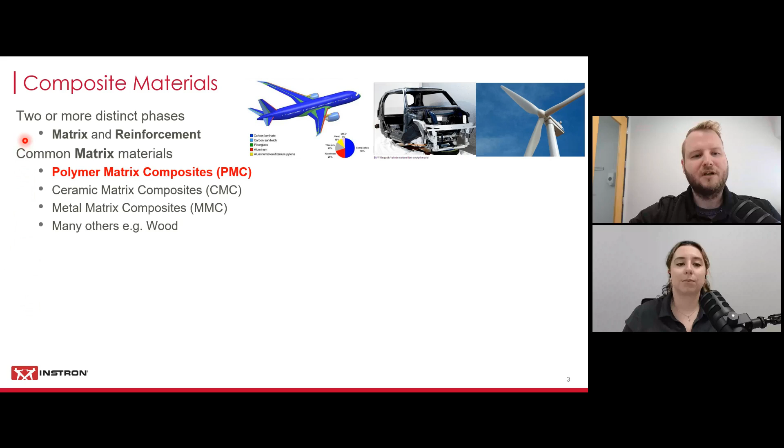So we're going to go over composite materials real quick here. What does it actually mean? It means that you have two or more distinct phases. So you usually have a matrix material and then you have a reinforcement. It's a combination of two materials, or at least could be the same material in distinct phases. For matrix materials, common materials used there are polymer matrix composites, so it's like a polymer matrix, or you could use ceramics, metals, and then there's also many examples in nature, like wood would be a natural occurring composite.

And nowadays you also see a lot of natural fibers being introduced, people trying to make composites out of natural fibers like hemp or bamboo. I've seen there's all kinds of examples, and also kind of a trend towards natural resins to be used.

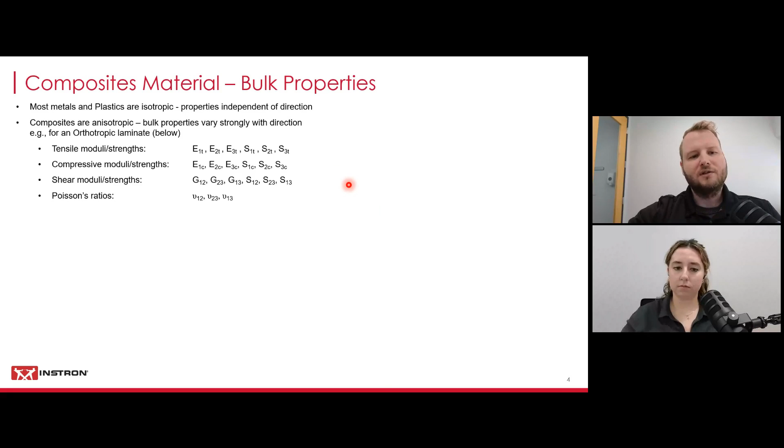Today we'll focus on polymer matrix composites reinforced with carbon fiber. Now, traditional materials like metals or plastics are considered isotropic, which means that their properties are independent of the direction. So, for example, if this was a piece of steel and you would apply a load, it wouldn't really matter at what point you apply the load. It would be more or less the same. It would have the same strength.

Now there's of course all kinds of mixes out there, and usually people would use a more balanced material, but still there's all kinds of things you need to determine to fully know the properties of your material. For example, you would need to check the tensile strength of your material, as well as the moduli in the tensile direction, in all 3 directions. You need to test that material to fully determine the tensile strength and moduli. The same is true with compression, because composite materials are usually much weaker in compression than in tensile, so you need to do that testing too, which usually involves a lot of fixturing. The same is true with shear, so you need to determine all the different combinations in shear, and then as well for the Poisson's ratio, which we'll touch on a little bit later.

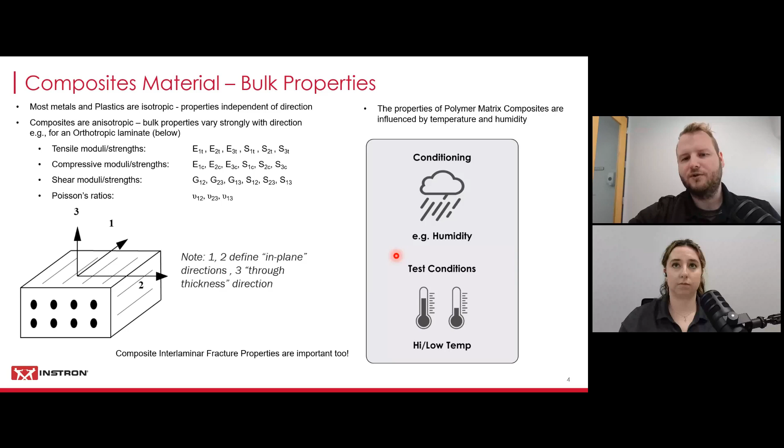Another thing to keep in mind is that you need to simulate the condition that your material will be used in. Composite materials usually take up moisture, so you need to simulate that. You need to condition your materials until they're fully saturated, just like they would be in their end application. And then you also need to think about the temperature that your material needs to operate at, so you need to simulate that, which is traditionally done with an environmental chamber on your testing machine. We'll also show you a few examples of that later.

Now, to show you some of those examples, some of those challenges really when testing these materials, we would like to show you a video that demonstrates some of those challenges. There's certainly a lot of them that we're facing when we're testing carbon fiber reinforced plastics.

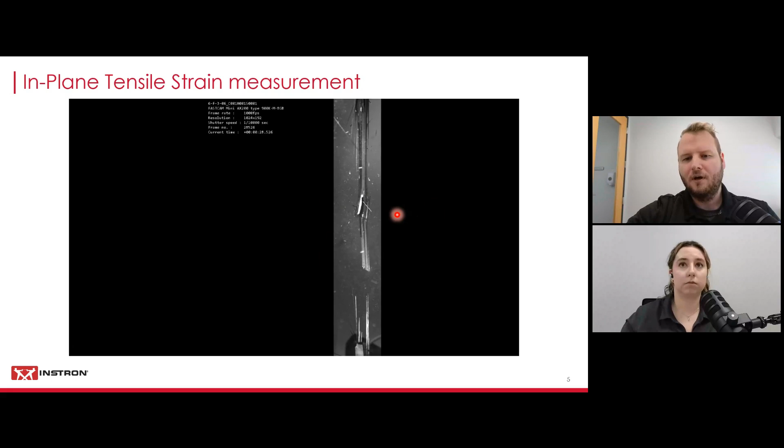Okay, so in this next part, Ashley will kick it off with some strain measurement techniques that are traditionally used for composites testing. Great, thank you, Stefan.

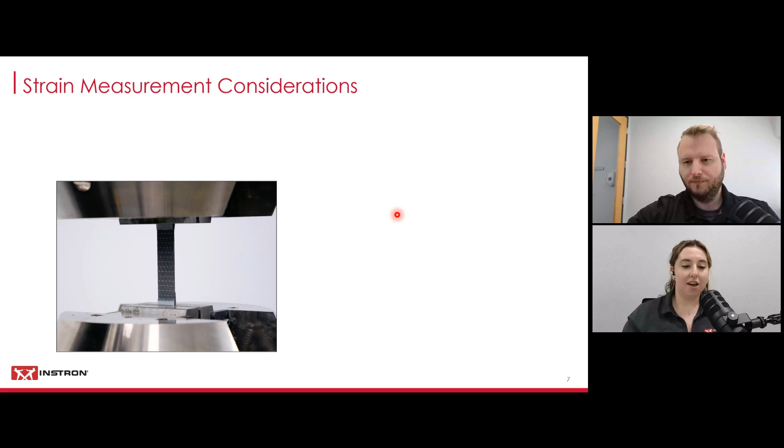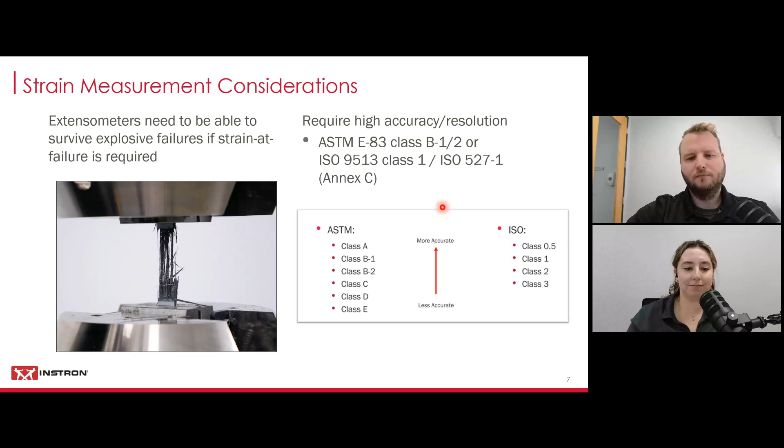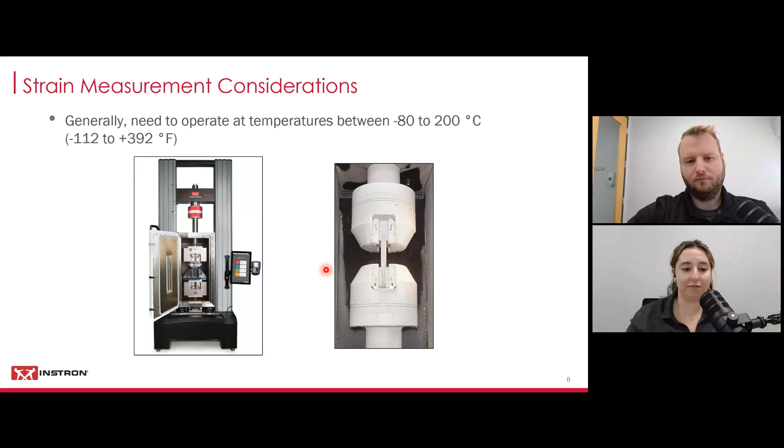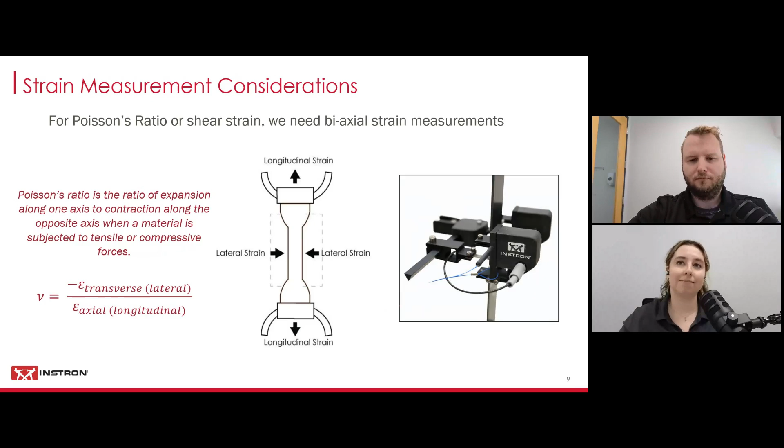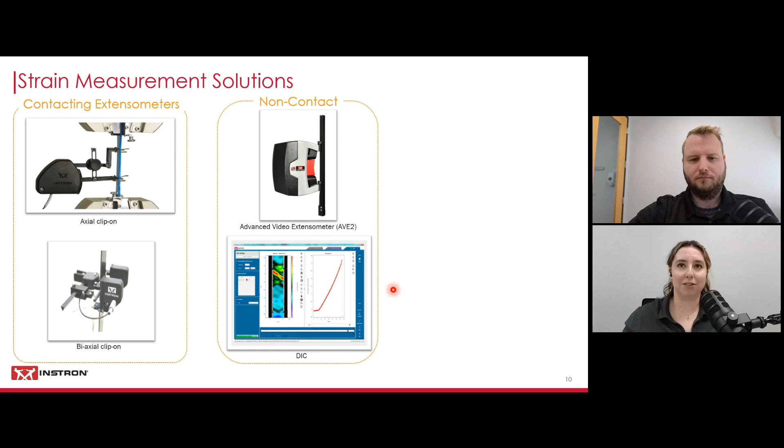So keeping these situations in mind, the types of solutions we're going to cover today are contacting extensometers, non-contacting extensometers like our AVE2, as well as bonded strain gauges.

Kicking it off, at a high level, contacting extensometers: manual axial clip-ons are available in a variety of gauge lengths and strain rates. They're typically considered rugged and lightweight and are able to handle most high shock breaks. We show an example of one remaining on in our lab. They are accurate to 0.5% of the gauge length, so your accuracy is dependent on what gauge length you're testing to. They can be used inside of chambers for hot and cold temperature testing.

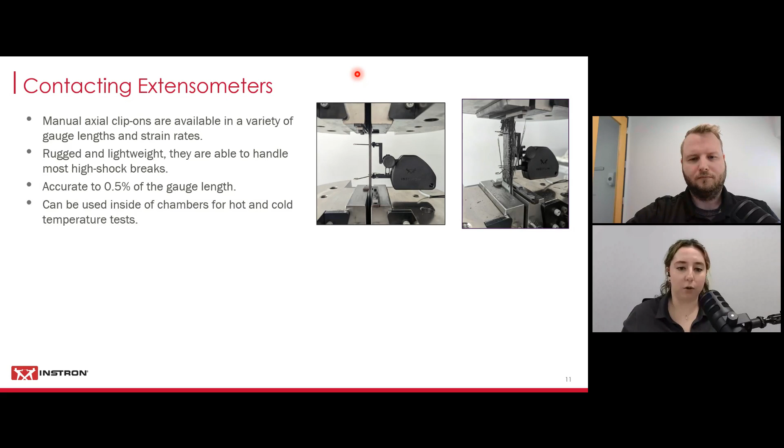They are capable of measuring axial strain, transverse strain, or both. But depending on the type of strain measurements you want to take, your part numbers are going to vary. It's not going to be one-size-fits-all.

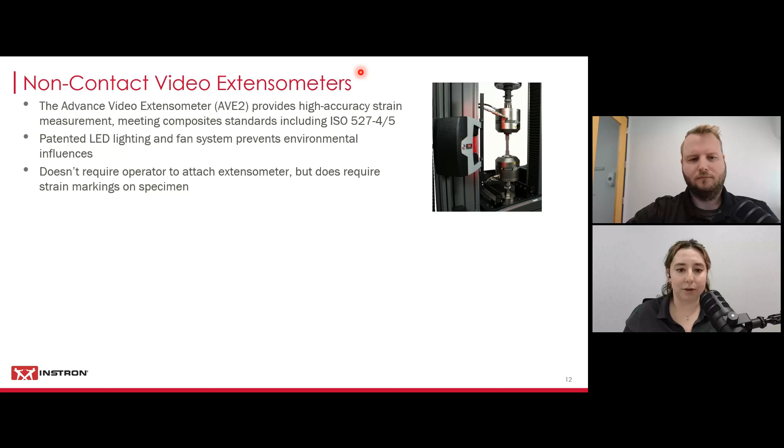Next, for non-contacting video extensometers, the Advanced Video Extensometer, or AVE2, is able to provide high accuracy strain measurements, meeting composite standards including ISO 527-4-5. It has a patented LED lighting and fan system, which prevents environmental influences. It doesn't require the operator to attach the extensometer, but it does require some specimen preparation and strain markings on the specimen for the video. It can be used on chambers for cold and hot tensile testing by attaching to the outside of the chamber. It can also be used for full field strain measurement using digital image correlation software, or DIC. And I'm going to let Stefan talk about that next.

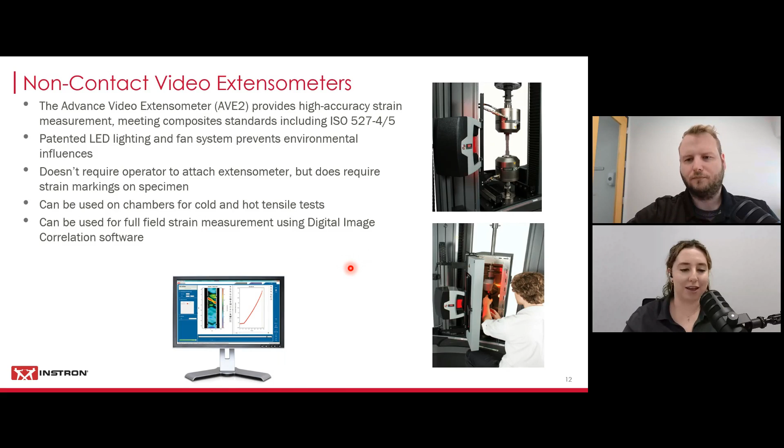Thank you, Ashley. So digital image correlation is an optical technique, and it compares the images of a tested specimen's surface to generate a full field strain and displacement map. This enables you to analyze advanced strain characteristics by visualizing the strain and displacement over the full two-dimensional surface of your specimen, like you can see here.

And that is being done with a random speckle pattern, and the camera then—so when you load your specimen, the video extensometer will record the images during the test, at an adjustable rate, where you can set how many pictures to take per second. The DIC software will then compare the images to each other and visualize the strain field for you. So you can now add a digital extensometer, for example, or a digital strain gauge to your specimen. We'll go over some interesting examples for this in the later part of the presentation.

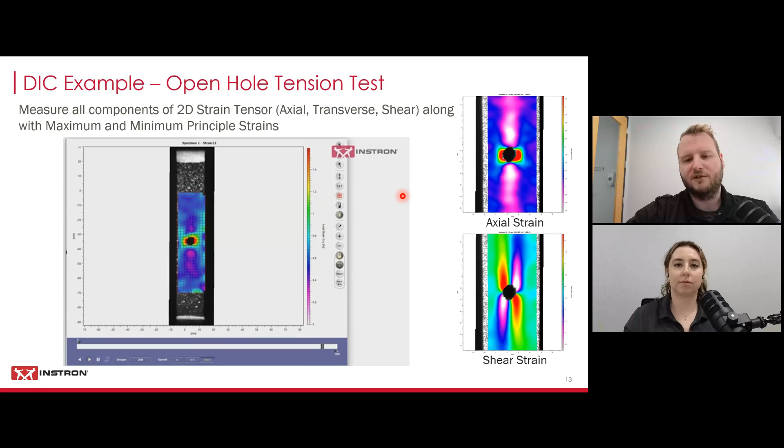Strain gauges—I'm not too surprised that most of you are using those because they are required in many instances. Strain gauges are very common in composite testing specifically. I don't see that really being used in too many other material applications, and we covered some of those reasons earlier already. But in some cases, there's really no other solution available, because either the testing standard requires it, or because of the testing fixture you need to use—for example, in compression testing of composite materials—which won't allow you to use a traditional clip-on extensometer. There simply won't be enough space.

Strain gauges themselves need to be used with appropriate conditioning electronics in order to process the resistance change and calculate your resulting strain. It's pretty common to use multiple strain gauges at once, and those readings are typically combined to generate things like the average axial strain or width strain of your test. You can also look at differences in the axial strain to determine the bending going on during testing, which is important especially for compression testing since you don't want any bending or buckling. You can also use multiple strain gauges to determine shear strains.

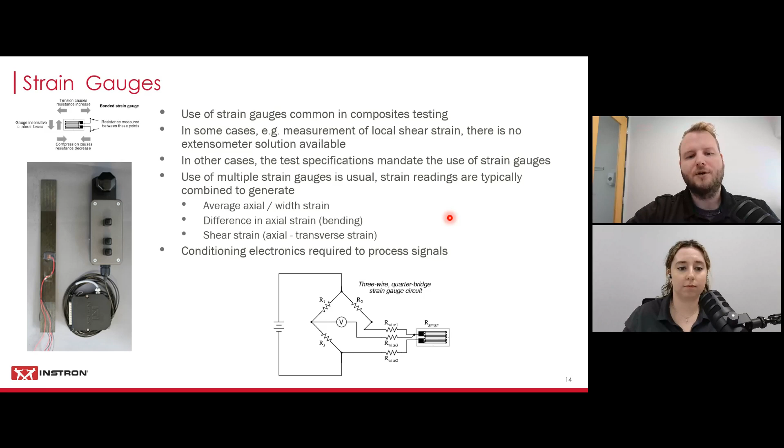One example is biaxial strain measurement, the relation between the axial and the transverse strain, which is often required in composite testing standards to determine the Poisson's ratio, as well as the shear strains of your material. A good example is the V-notch shear test, as described in the ASTM D5379 testing standard.

That's a good example of a standard that requires determination of the shear properties of your material. This test method requires at least 2 strain gauges centered in the gauge section of the specimen, that V-notched section. These gauges need to be mounted at plus/minus 45 degrees to the loading axis. The gauge selection is a compromise based on the type of material you're testing, since it can really influence which gauges you should use. This testing standard actually has recommendations on that, given in section 7.51, which should help you determine the right strain gauges for this kind of testing.

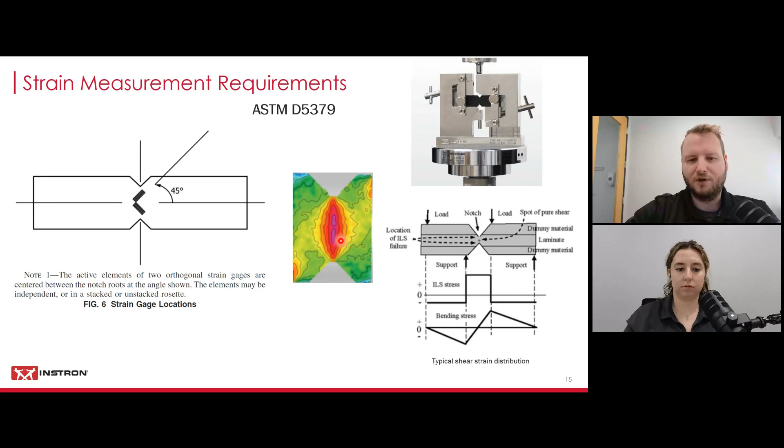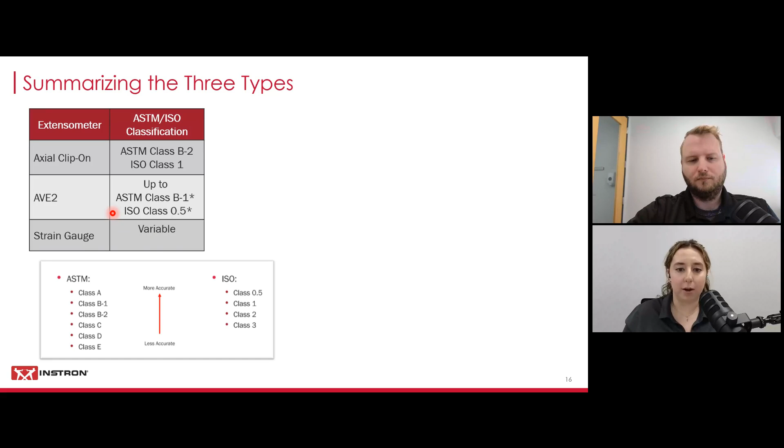To summarize the 3 types we just covered in a broad sense - our axial clip-on, the AVE2, and our bonded strain gauges - in terms of ASTM ISO classification, our clip-on is guaranteed to meet ASTM Class B2 and ISO Class 1. The AVE2 is up to ASTM Class B1 and ISO Class 0.5. I have some asterisks because that classification depends on the lens you're testing with, which can affect your field of view and the gauge length marked on your specimen. Your bonded strain gauges are variable and come from the manufacturer of those gauges. In terms of temperature range, the clip-on, as I said before, is capable of going inside a chamber and can handle -100 to 200 degrees Celsius.

The AVE2 is capable of viewing through the window on the outside of the chamber and can handle -20 to 350 degrees Celsius. I have a couple more asterisks because if we get any lower than -20 degrees Celsius, we risk frosting over the glass on the chamber, which can cause visibility issues with the AVE2, so you have to be cognizant of that. The strain gauges have the highest temperature range, from -269 to 800 degrees Celsius.

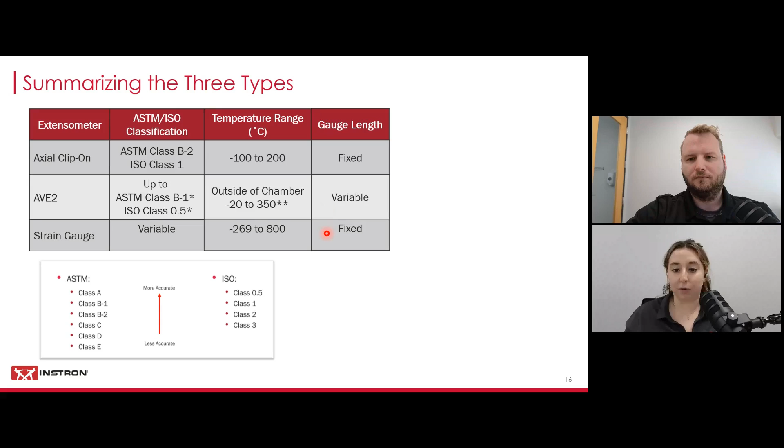Your gauge length for axial clip-ons is going to be fixed, so if you have varying gauge lengths - 10 millimeters, 20 millimeters, 50 millimeters - you have to purchase a clip-on for each one of those gauge lengths. Your AVE2 is variable, as it's able to read the gauge length markings on the specimen for you. Your bonded strain gauges are also going to be fixed gauge lengths, 3 millimeters, 6 millimeters, and you'll have to purchase different ones for the different gauges you want to test with.

In terms of price, the clip-on is considered more affordable, lower in the price range. Your AVE2 is going to have a higher price point as it's automatic and able to read those variable gauge lengths - we'll talk more about other features of the AVE. Your bonded strain gauges we consider high cost because of having to have them actually installed onto the specimens themselves. In terms of installation, clip-ons, while manual, are very easy to install.

They're very repeatable. The AVE2 is extremely easy as it's already set up. Really, you just need to make sure that you're marking your specimens with the proper gauge length. So we consider this easy.

And then bonded strain gauges, we consider this difficult as you might have to have the specimens sent to an outside vendor to be bonded or have an operator doing this process for you and making sure that they're properly adhered to the specimen before test.

So with that, what we're going to do is show the examples of the testing that we did here at Instron. Just to say before we kick it off, in the next section we're going to show you these examples we mentioned earlier. It's important to understand that what we're showing is not a substitute for reading the full testing standards that we cover. Also, the equipment we used for the testing is not calibrated or verified within our lab because we are constantly changing fixtures and load cells.

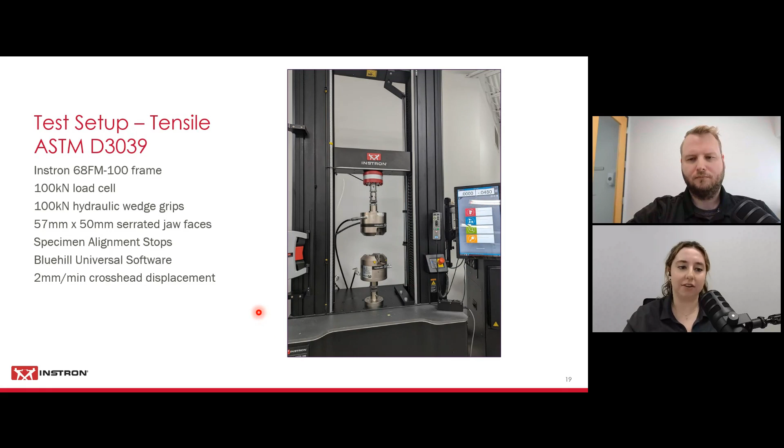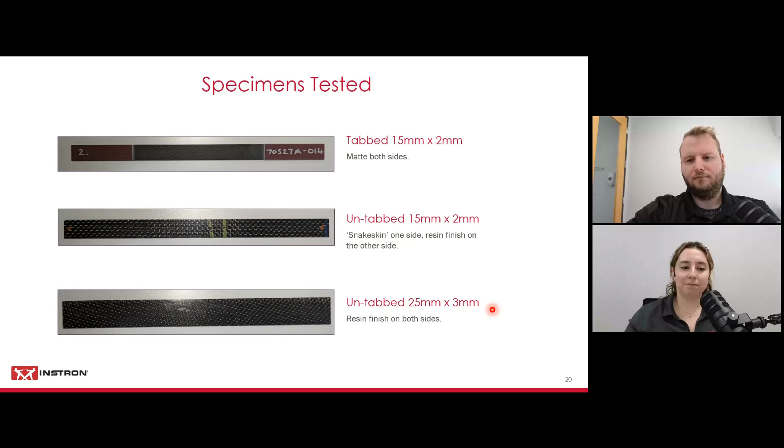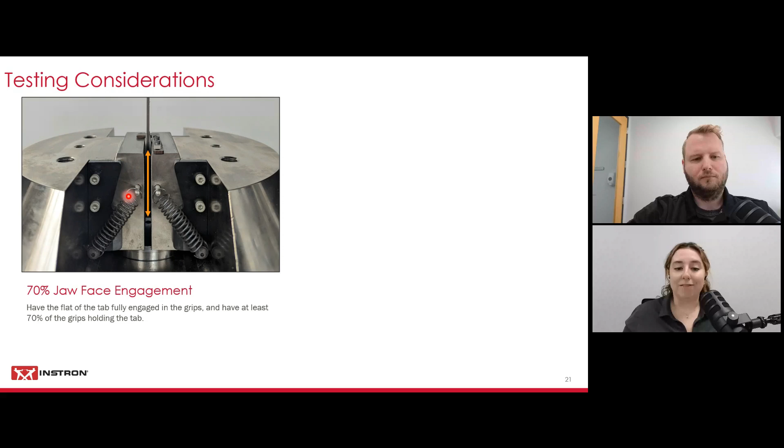Some testing considerations to take into your lab: 70% jaw face engagement. You want to have the flat of your tab fully engaged in the grips and have at least 70% of the grips or the jaw faces holding the tab. Not doing this actually risks jaw face pivot at the bottom of the jaw faces, which can risk having your specimen pull out of the grips before even the end of test is done.

Next, something we like to use pretty often when doing composites testing or even metals testing is specimen alignment stops. These stops on the upper and lower jaw faces ensure vertical alignment and repeatable placements every time. And honestly, it just makes it way easier to load into the grips if you're having to hold the specimen in one hand and then close the grips with your other hand. So it speeds up testing and makes sure that we're vertically aligned properly.

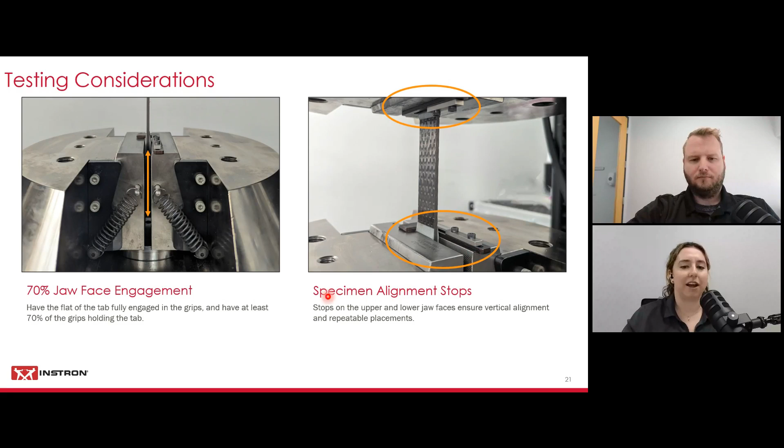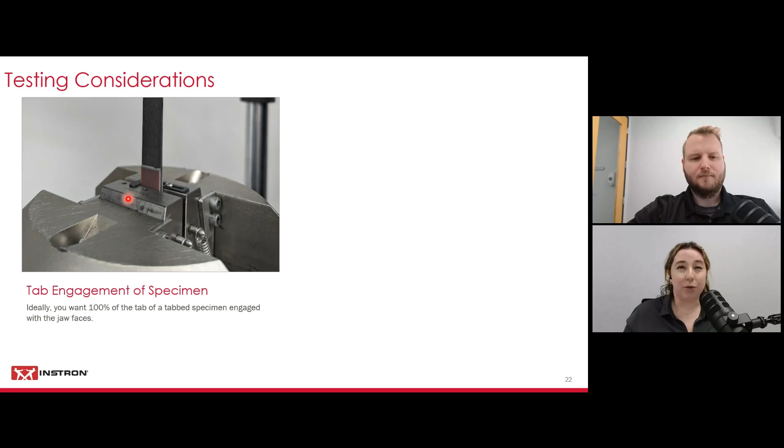Next, at least with our tabbed specimen, ideally you want 100% of your tab engaged with the jaw faces to prevent any kind of premature tab breaks. With the specimens I had and the equipment I was using, I wasn't able to get full engagement, but I did with what I could. This was kind of a worst case picture. I got better engagement with some other photos.

And then lastly, scoring of a specimen. If you are using a contacting extensometer, it's undesirable if that installation pre-damages the surface. Now this is a plastic dog bone. Typically we see this happening in softer materials such as plastics, elastomers. I didn't happen to have any issues with this during my testing as my specimens were robust enough, but you just want to be aware if you have a softer material or maybe a ceramic type of composite, you don't want to pre-damage the specimen before you've even started testing.

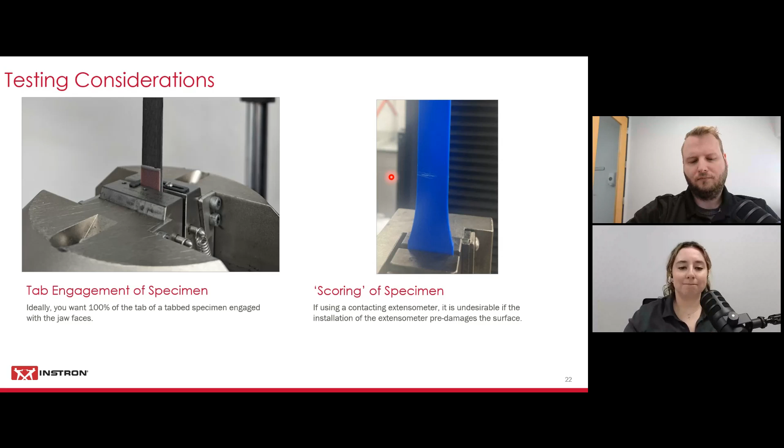Thank you. For the class of extensometer, it requires E83 class B1 at least. And if you have a good memory, you remember that clip-ons are guaranteed to meet ASTM class B2. When you're getting your clip-ons calibrated, you do have a better chance of reaching class B1 if you have a larger gauge length and low travel.

So I used a 2-inch 10% elongation clip-on, not verified, but that's okay. But if we were to have this verified by a service engineer, you have a better chance of getting it classified as B1. So again, if you are using a clip-on, you want large gauge length, low elongation. That gauge length requirement from the standard, you can do from 10 millimeters to 50 millimeters, or 1/2 inch to 2 inches.

Calculations that care about the strain are your chord modulus or your modulus of elasticity, your ultimate tensile strain, and then Poisson's ratio. And we only did axial testing with our extensometers, so we're not actually going to report out today on any kind of Poisson's ratio.

And then lastly, just some highlights for what kind of specimens you can use in D3039. Tabs are not required. The thickness is as needed, the width is as needed, and really you just need a constant rectangular cross-section.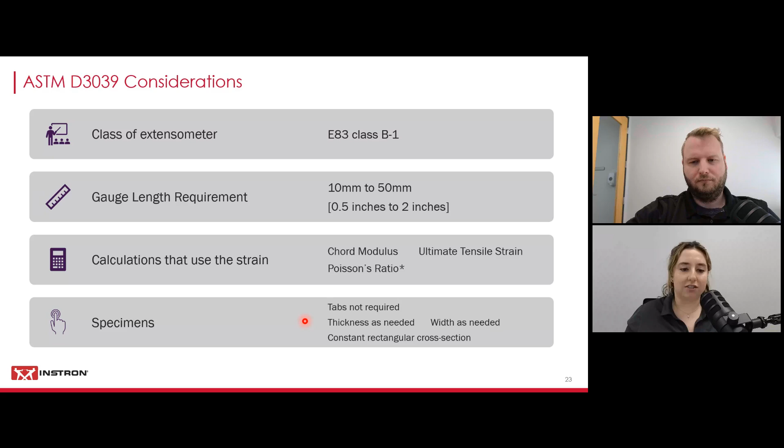So we can see the setup of our 3 specimens at the beginning of the test. I did not have any issues with the clip-on maintaining contact or maintaining that support with any of the specimens that I had, even though they did have varying surface finishes.

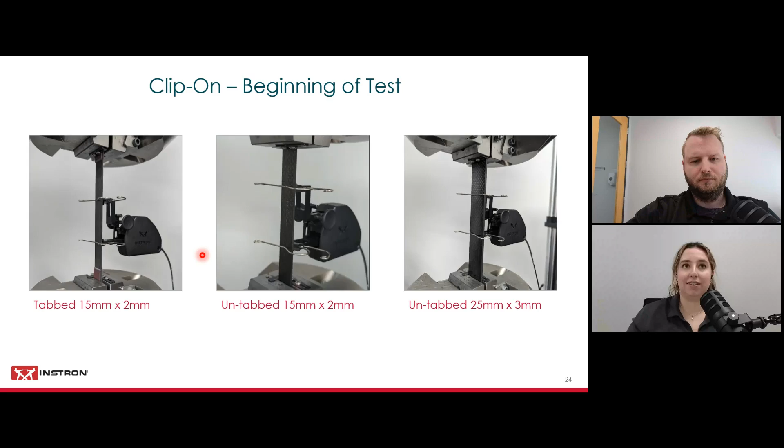So if we go to the next slide, we can see what happened at the end of the test. And there's actually a video on the left. There you go. So that was a pretty explosive break that we experienced. Maybe you want to play that again, it's kind of fun to watch.

So the tab specimens were the ones that I actually tested with first, and I experienced those high explosive breaks. Even though my clip-on fell and landed onto the base of my frame, there were no visual indications of it being damaged, and I was able to use it for the rest of my testing without any problem.

Now, something that customers do is either attach some kind of cord, or they use the cabling that comes off of the extensometer, and attach it to a magnet or some kind of holder on the column cover of the frame. So if you do have explosive failures, that cord will catch the extensometer before it falls and hits the ground.

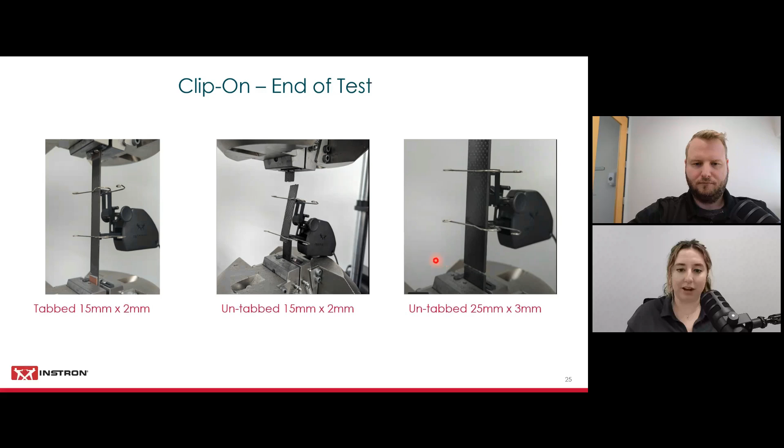For my second specimen, can you go back? Thank you. For my second specimen, it was a high impact break. It broke just outside of the jaw faces, and thankfully my grips caught my extensometer before it completely fell. And then my last one, my largest untabbed specimen, did have a break just outside of the jaw face, and was also a high force break, and we were able to maintain contact throughout the entirety of the test.

So here are the results of my specimen number 1, that tabbed specimen. First thing we notice is that clip-on remained on during the test, during break, so I actually ended up having negative strain. And the way that Bluehill calculated my force strain, it actually called out my ultimate tensile strain as 0.178%, just above 25 kilonewtons. And this is incorrect - that's not my ultimate tensile strain.

So really, with this kind of test, I probably want to remove the clip-on at around 0.5% strain, and then just let crosshead displacement take over. And crosshead displacement is absolutely acceptable in terms of end of test criteria, and we'd be able to have the correct ultimate tensile strain with the correct force.

Now, my blue line is my chord modulus, or that modulus of elasticity. And the way the standard dictates it is that it's the slope of the curve from 1,000 to 3,000 microstrain, so that is right at the beginning of my test. Because that's my chord modulus being calculated, and we're looking good up until about 1%, which is where we can start to see some of those micro cracks, it's definitely acceptable for me to have removed the extensometer earlier within the test and let that crosshead displacement take over.

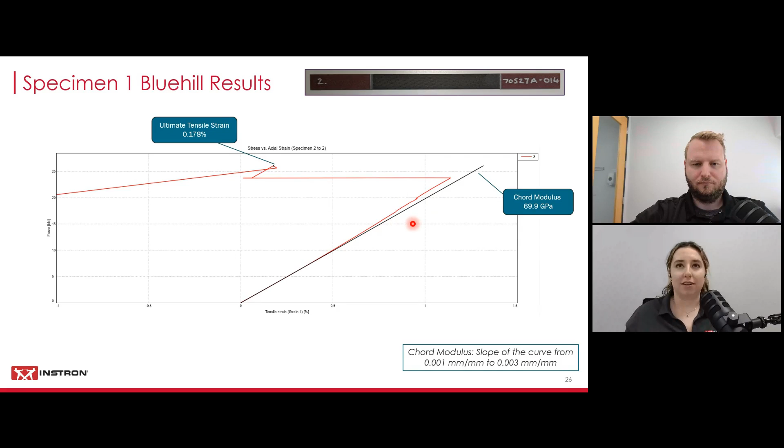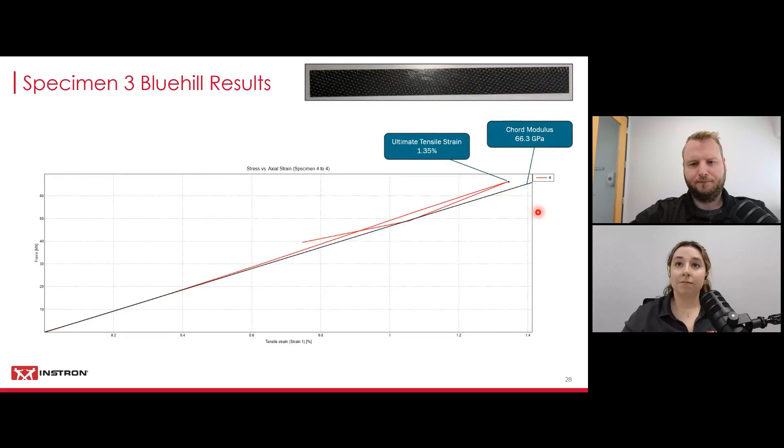Then lastly, that largest specimen, which broke just above 60 kilonewtons, we have a little bit of negative strain occurring because of how high impact of a break that was. So it's a little risky that I left it on till the end of break, but I did capture the correct ultimate tensile strain that aligns with my max force. This is another instance where I could probably remove it earlier in the test and let that crosshead displacement take over.

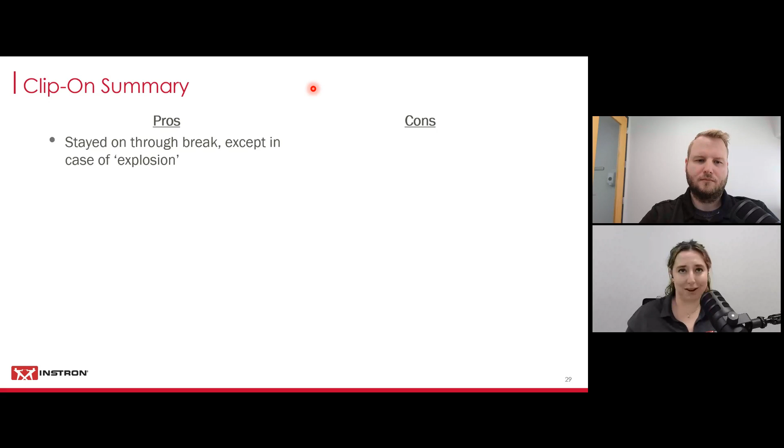And our chord modulus for this one looks good at 66.3 gigapascals. So to summarize the clip-on: for pros, it did stay on through break, except in that one case of explosion. I don't think much is going to hold on to that. It had great smooth stress strain curves until those micro cracks and breaks began, and it's very quick to install.

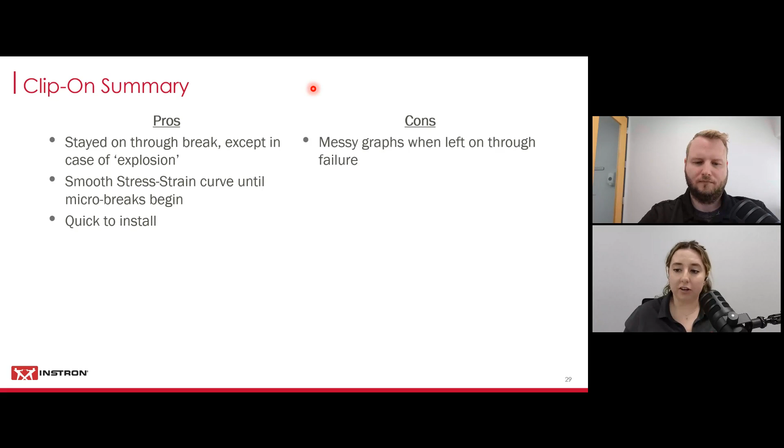Some cons are messy graphs when left on through failure for at least my first and third specimen. It did pull the incorrect ultimate tensile strain when left on through that explosive failure. And then I didn't always have consistent gauge placement where my gauge length was correct, but the location I placed the extensometer was a little low, sometimes a little high. That's just something that comes with practice. I'm not doing this every day, but once you get the hang of it, people are very comfortable and it's very simple to attach it to the specimen.

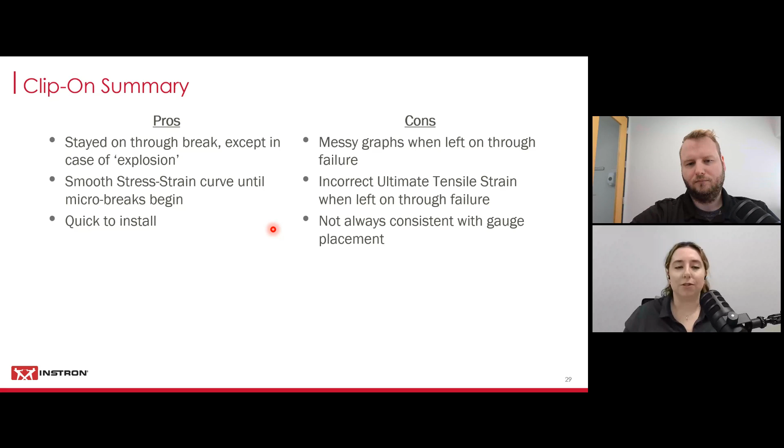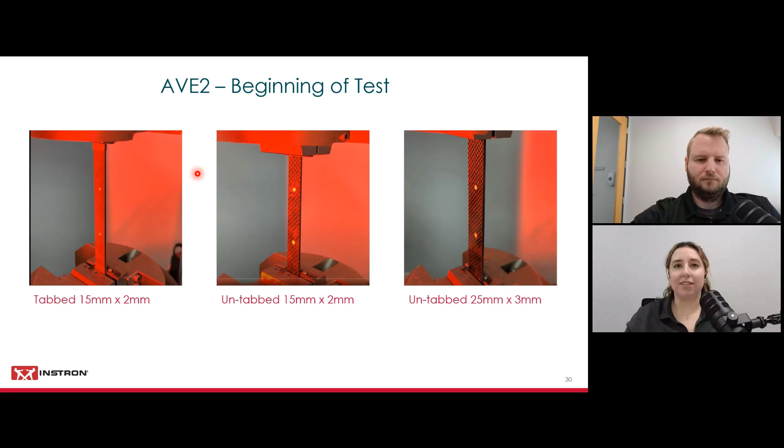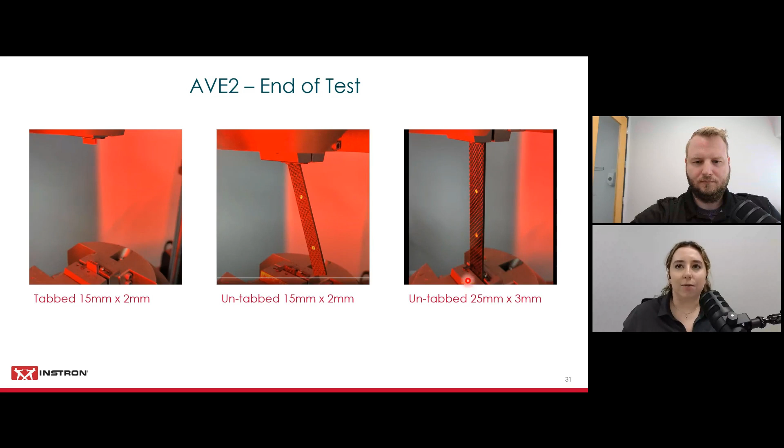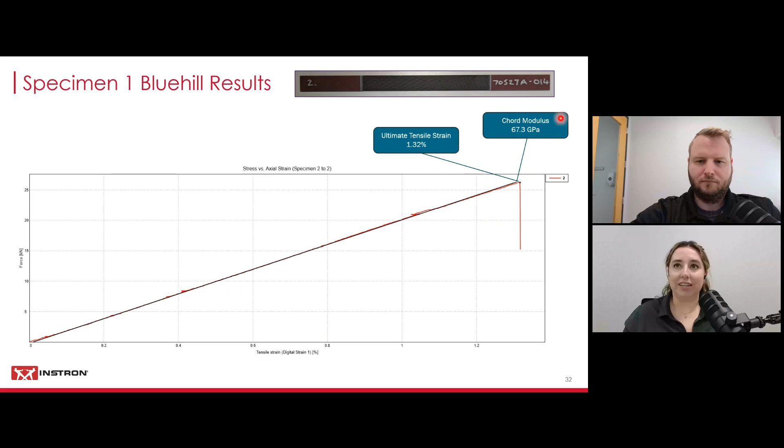Next, we have that untabbed specimen. Again, looks good, nice rise over run, a little more wiggly, but absolutely okay. We're still capturing our ultimate tensile strain at 1.38% and capturing that chord modulus at 63.2 gigapascals. And then lastly, we have our largest specimen with the ultimate tensile strain of 1.34% and that chord modulus of 58.1 gigapascals.

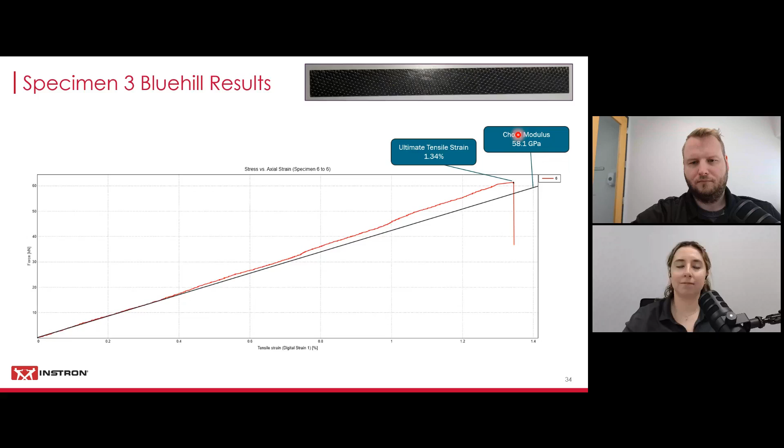So for the AVE pros, no contact means absolutely no influence on the test. We automatically read the gauge length. I could have done multiple gauges, I just did 50 millimeters. And it was able to track the dots through the entirety of the test.

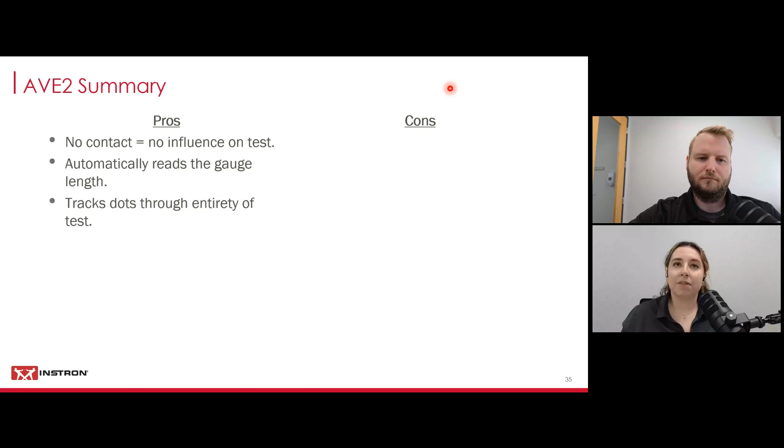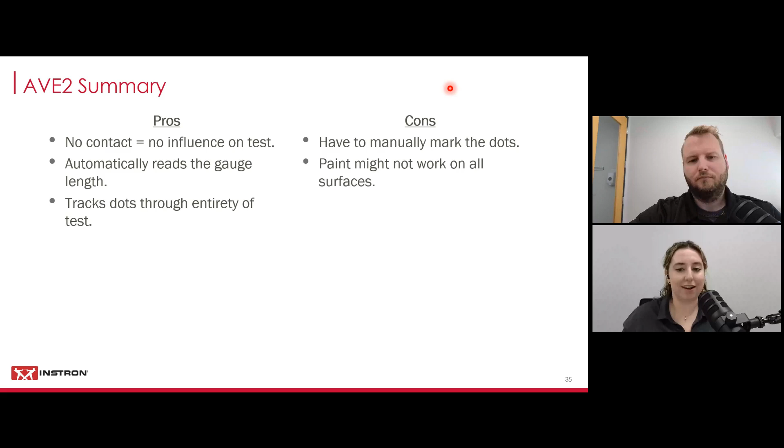Cons is that I did have to manually mark the dots, so that is a little bit of time. Your paint might not work on all of your surfaces, as I said, I was fine with the stuff that I had. And then lastly, accuracy requirements for Poisson's ratio are not met for the standard. That is to be said, but what's also to be said is that labs still do axial and transverse measurements with the AVE as a comparison. It's not going to be accurate enough to meet the standard, but you still absolutely get usable results.

And then I just want to go back real quick for the paint. All you want to do is make sure that you have some sort of contrast. So I used white paint, you might need to use black paint. But if your surface is not actually taking that paint and it's not staying on, you might have to get creative and use stickers, or you could draw lines on your specimens. But for the most part, paint pens and dots should work okay.

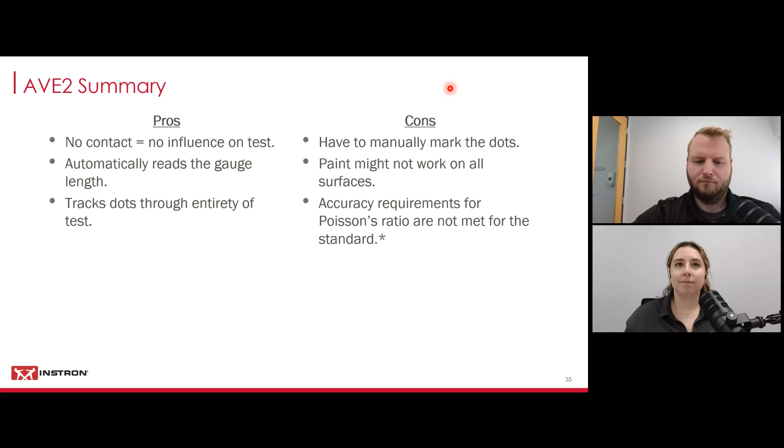Composites, as we've said, are influenced by vertical alignment. I could have aligned it wrong, I could have changed my clamping pressure. You're going to have some variables in there that change that.

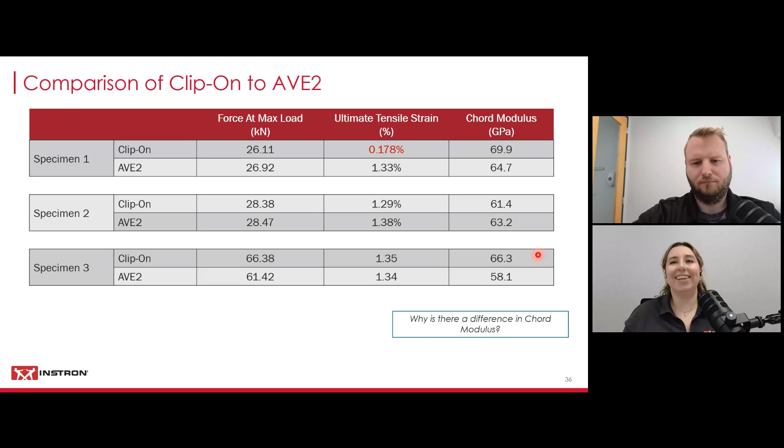Now my chord modulus for specimen 1 actually came out lower in my AVE2 by about 5 gigapascals. For specimen 2, it came about 2 gigapascals lower with the clip-on. And for specimen 3, it actually came about 8 gigapascals higher with the clip-on as compared to the AVE. Stefan, if you click real quick, why is there such a difference in my chord modulus?

I'll explain why. So I didn't bring this up at the beginning, but ASTM D3039 warns of system alignment. Any kind of excessive bending will cause premature failure, as well as highly inaccurate modulus of elasticity determinations.

When I tested my specimens, I set my preload to only 10 newtons, and they broke at 26,000 newtons and 66,000 newtons. This preload was insufficient, which meant that I had some kind of bending in my specimen, and that my excess z-axis was affecting my AVE2 reading. So the AVE2 is not only very accurate in the X and Y, in the axial and transverse directions, but also in the direction coming in and out of the lens of the camera.

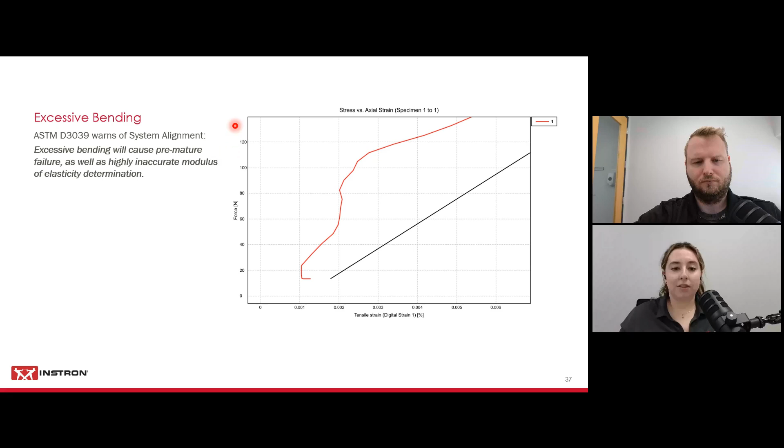Stefan, if you could hit a couple times, thank you. So again, preload for my AVE2 specimens was insufficient, and we can see this in my graph on the right where I've zoomed in at 1,000 and 3,000 microstrain. So what we want to do here is have a sufficient preload of around 1% of yield. So my preload should have been at like 260 newtons and 660 newtons, and that would have helped with removing my slack.

And also we want to make sure we're testing with calibrated equipment. We're not testing with equipment that's been verified by a field service engineer, but you do want to make sure that your lab is staying up to date on your calibrations and certifications.

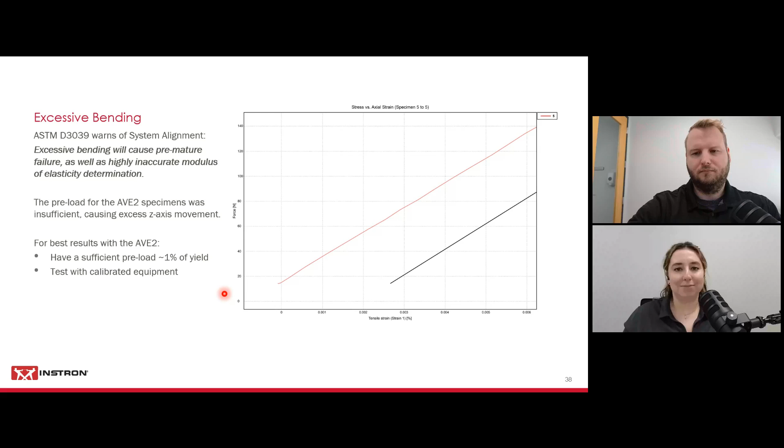And if we click one more time, we'll see a comparison of the clip-on. So that clip-on, because it's actually making contact with our specimen, it does not have that z-axis error, but you still absolutely want to make sure that you have that sufficient preload of around 1% of yield and that you're testing calibrated equipment so your lab has the best chance to capture the best data.

Thank you, Ashley. Okay, now I would like to show you some of the compression testing that we've done in preparation for this webinar.

So the test method that I ran here is ASTM D6641, which seems to be one of the most popular composite compression testing standards from what we can tell here at Instron, at least. This test method uses a combined loading approach, meaning forces are introduced into the specimen via shear loading and also via end loading at the same time.

You can see my load string set up here on the left. It's a 100 kilonewton testing machine, same one that Ashley was using for the tension testing from our 6800 series. It's equipped with those same hydraulic wedge grips, but in this case I am piggybacking fixed compression platens on those hydraulic wedge grips, and you can see the ASTM D6641 fixture in between those fixed platens.

The testing standard actually recommends using fixed platens as opposed to using a spherical seat on top, which is still allowed in the standard, but the standard itself is recommending fixed platens.

Piggybacking is a great option to do on hydraulic wedge grips, especially if we go into grips that are much higher in capacity, 300 kilonewton for example. There's a version of these same grips that we offer. You don't want to remove those grips, because if you need to comply to the Nadcap alignment requirements on your testing machines, you would invalidate your load string alignment verification. Also, usually these grips are pretty heavy. These here you can still install by hand, but if we're going up in capacity, it's not really possible to move those grips by hand. You'll need some equipment, so it's also a nice convenience feature.

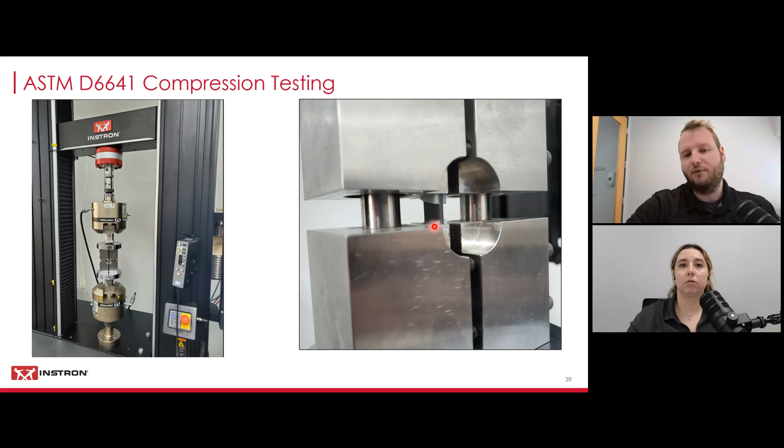You can see this testing method is running with an unsupported gauge section, as opposed, for example, to the D695 testing standard. It's only a 13 millimeter long gauge section between the fixtures, so it's really not possible to install any common extensometers there to measure the strain. So you need to use some other kind of transducer in the form of strain gauges, which I will show you as well, but I first want to look at a complete test here.

This is the specimen zoomed in now before the test, and then this is after the test when the specimen failed. You can see it failed in the gauge section, and we have a video of the test. In the beginning, the video is sped up, and you'll actually see the fixture moving down, so all of that compliance within the fixture building up - the fixture actually moves. Then right before the specimen fails, we slowed down the video so you can see the failure, which should be occurring now. There you go. That's how that looks when you run an ASTM D6641 test.

It's very important for a successful test, or actually required in the testing standard, that the specimen ends do not crush when the specimen fails. This could indicate that the specimen preparation was improper, and it's very important that the ends of the specimen are machined flat and parallel to each other, and as perpendicular to the loading axis as possible. You can see here, this is one side of the specimen after the test - the ends did not crush.

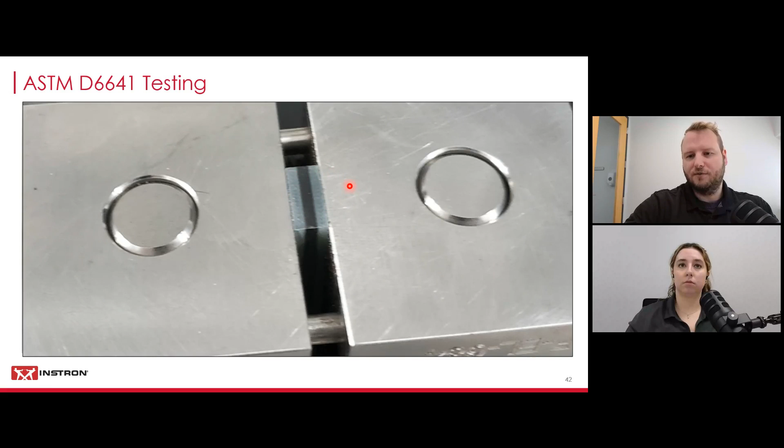On this picture you can see the fixture taken apart after the test, so the upper and lower part taken apart with the specimen still in place. Then I took the specimen out, and I wanted to give you a nice close-up picture of the failure location here, right where the tabs are ending within the free gauge section. You can also see the fixture basically making contact, gripping into those tabs, and that's certainly a lot of the compliance we've seen in the video when the fixture is actually moving down, loading the specimen. The specimen failed around 45 kilonewtons - it's a unidirectional material.

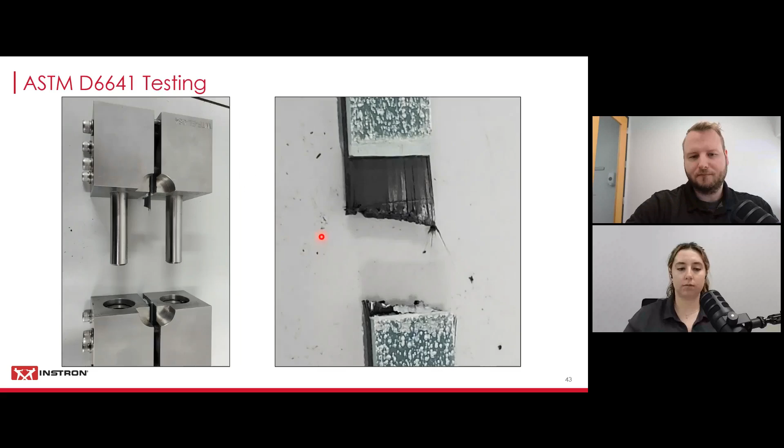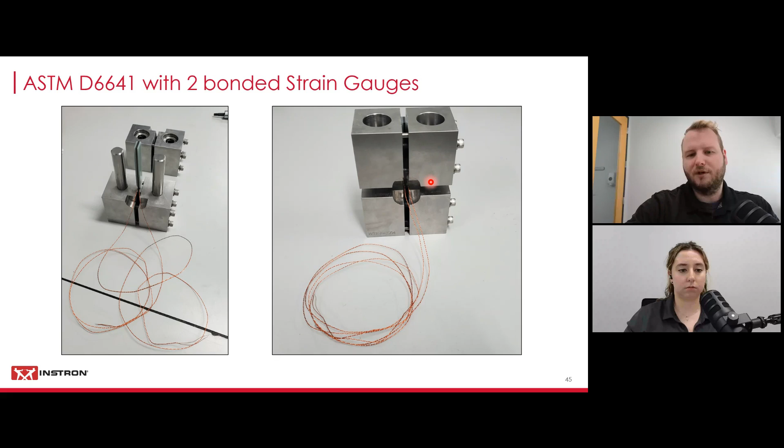And then you need to make sure that you use the right torque, which again is recommended in the standard. For the first test that I ran to failure, I did use the recommendation in the standard - I think it was between 2.5 and 3 Newton meters, which worked out perfectly as you've seen in my test. I got the right failure mode and did not get any end crushing. That is where you would want to make adjustments if you don't get the right failure modes or your ends crush.

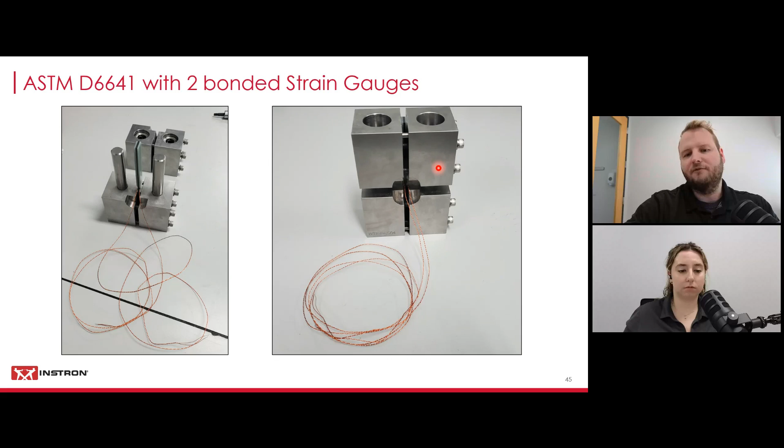This is a close-up on both sides of the specimen here with the strain gauges and the cables coming out. Then I place the fixture like that in between the platens, and the cables lead into our conditioning electronics as we've shown earlier in the presentation. These need to match the strain gauges that you're using on your specimen, so these are also configured for a 350 ohm quarter bridge setup.

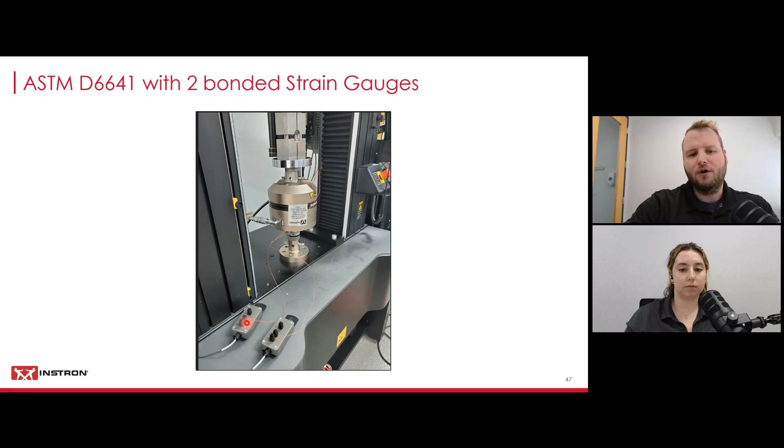Then I took this specimen up to 30 kilonewtons. Again, this is a unidirectional material - it's extremely stiff and therefore also shows very low strain readings. I was actually surprised how low those were, to be honest. I was hoping to be able to show you a little bit more, so maybe taking this all the way through failure would show a little bit more.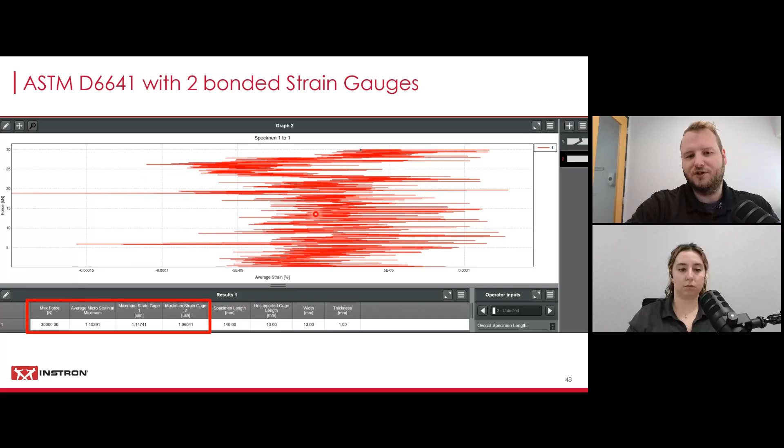Then you get the strain readings of both strain gauges, which you could also plot, and you can already see here we are really in the 1 microstrain area. I had to change the units to microstrain to even be able to display them. Then you can average those two results, and you can also make an averaged graph, which is the one that we're showing here. So you can look at them individually, or then use the averaged one in the middle. Very, very low strain for these unidirectional materials, which is also kind of like one of those characteristics of composites - very stiff materials.

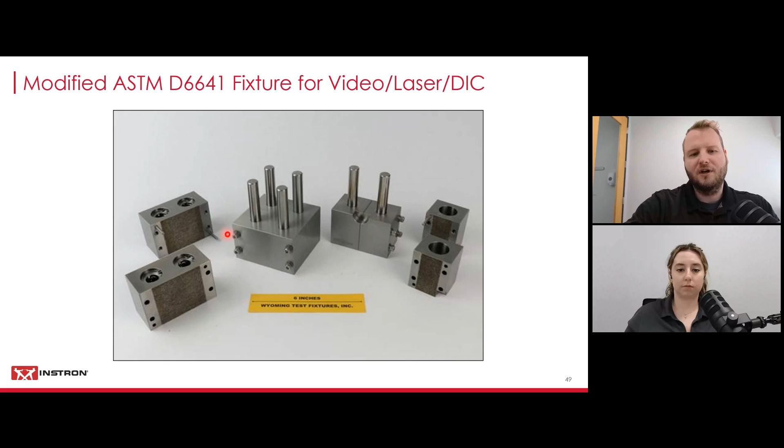If you ever - this is just something interesting I thought I'd share - you see the traditional fixture here on the right. There's also custom versions of this, supplied by Wyoming Test Fixtures, where you could use some kind of video laser or DIC.

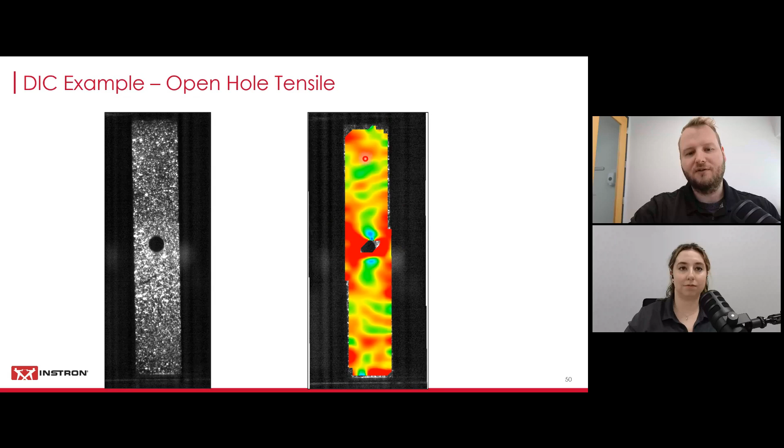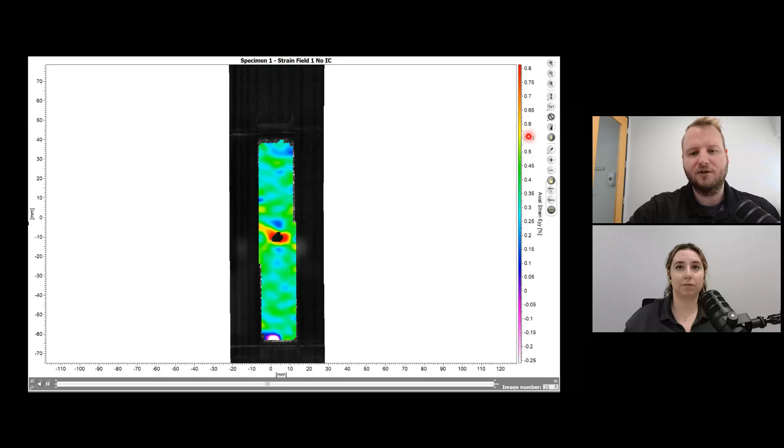As the test is running, we're generating those strain fields with all those different pictures in the software. This is how that would look for this open hole tensile specimen. You can see the software going through all the images. For this one, we had a relatively low capture rate, and on the right you can see the scale for the actual strain.

So how are we looking on that poll? We got about 28% do and 73% do not. So that's kind of within expectations.

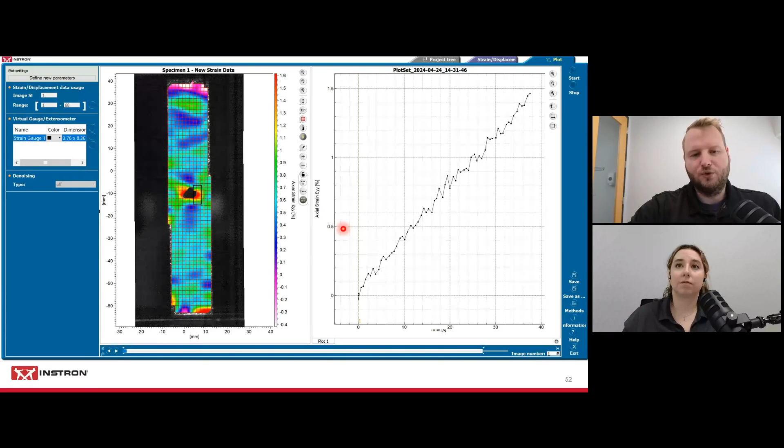DIC is not an accepted technique in the standards yet, but it's definitely extremely helpful. You can see the advantage right here. Instead of just having a localized strain measurement, which might not even be the highest strain region, with the DIC software you can see the highest strain regions and then apply strain gauges or extensometers manually. You can change the size of them and the location. Here I have one strain gauge simulated, and when you run through that test, this is the curve it generates, telling you your strain here is around 1.5%. That is a huge advantage of DIC.

We're talking about alignment a lot when testing composites, so we thought it's a good idea to give you an example of a purposefully misaligned specimen in your testing. You can already see it being a little crooked in the pictures.

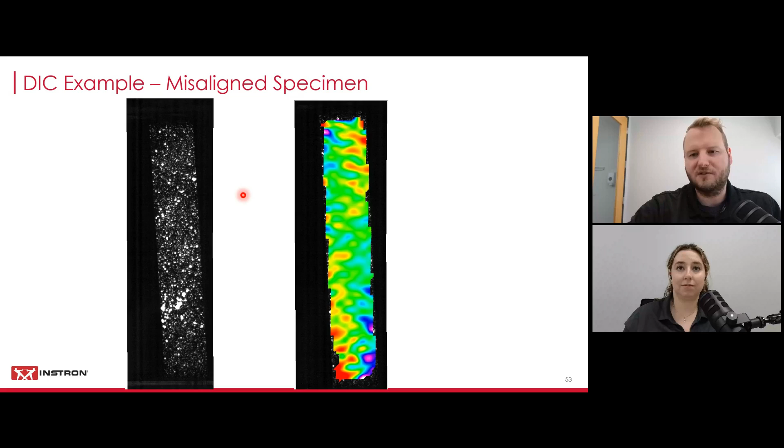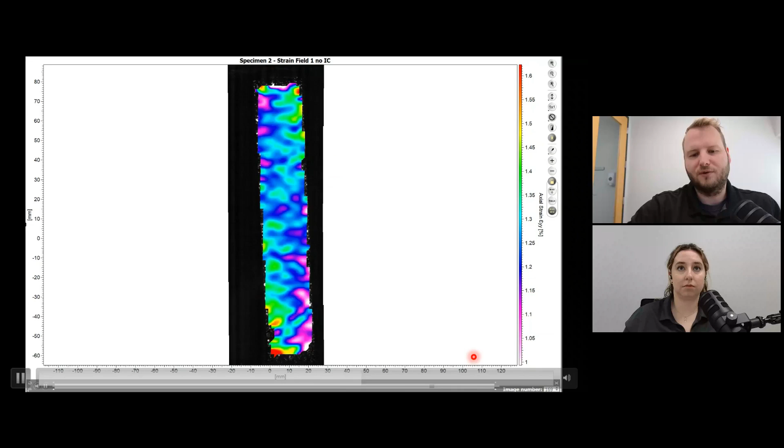You can see again here, generating that strain field from the point where strain was actually being put on the specimen. Those areas on the top right and bottom left are building up, and towards the end they're turning into red, where we're really getting to the 1.6% strain reading. At the end, definitely not a good failure here - it broke on both tabs. This is why alignment is just so very important.

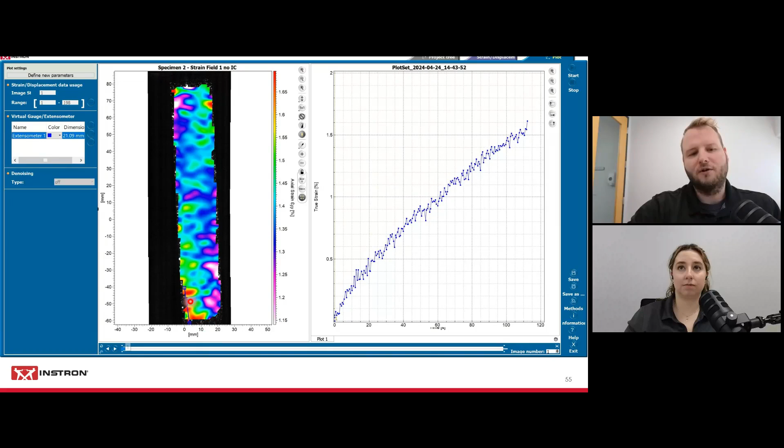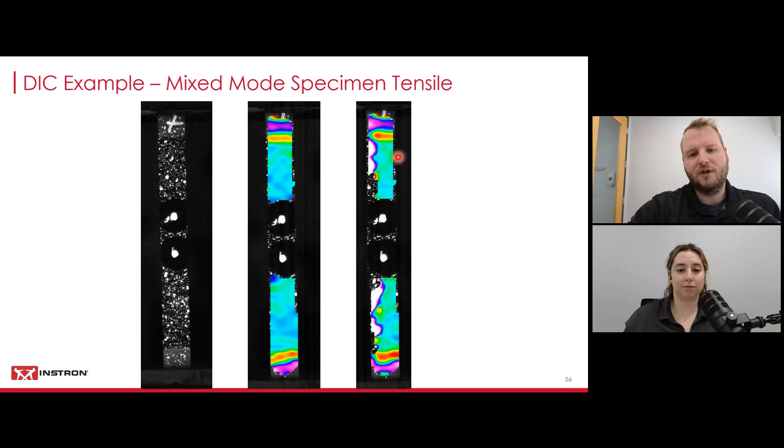Lastly, I want to show you quickly a mixed mode example. This is where you can use the AVE2 for your actual strain reading. If you're interested in the strain fields of the rest of your specimen, you can put that speckle pattern there and get those strain readings at the same time while getting a verified reading - you can use those strain readings in the axial direction with the AVE2 and still comply to your testing standard, while getting interesting information on the strain fields happening outside of that gauge section.

I think this is the exact same tabbed specimen that Ashley was using, and you've seen that every time that specimen kind of failed at the tabs. So now you can see what was actually happening there.

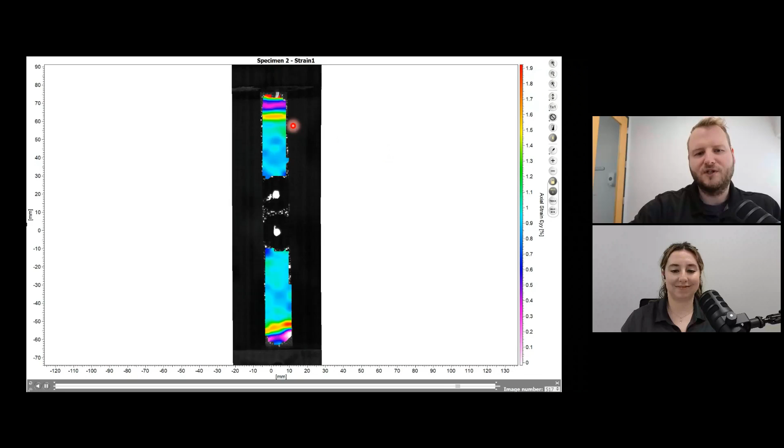We're taking that strain reading here, and if you were to use a traditional clip-on extensometer or just the AVE with the dots, you would be unaware of what is actually happening here. Everybody can imagine that you have the tabs sticking out a little too far, and then they're kind of peeling back, influencing your specimen. That's what it looks like over here.

Another interesting thing was that one of the plies of the specimen seems to have delaminated toward the end of the test and actually came off. You can see the software is no longer able to generate the strain field within that area. So depending on your failure mode, that might be something you need to keep in mind when running DIC on your specimens in your lab.

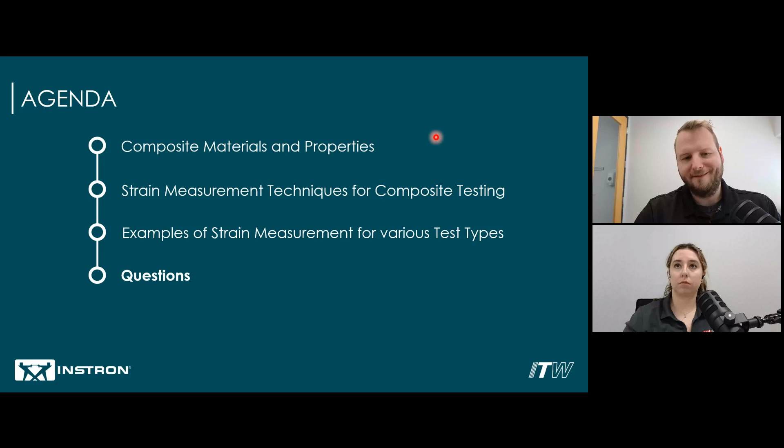If that is more of an R&D situation, then I think probably using DIC would be a good approach - getting one of those modified fixtures, putting a random speckle pattern on there, and generating a full strain field. That's probably something I would personally be really interested in.